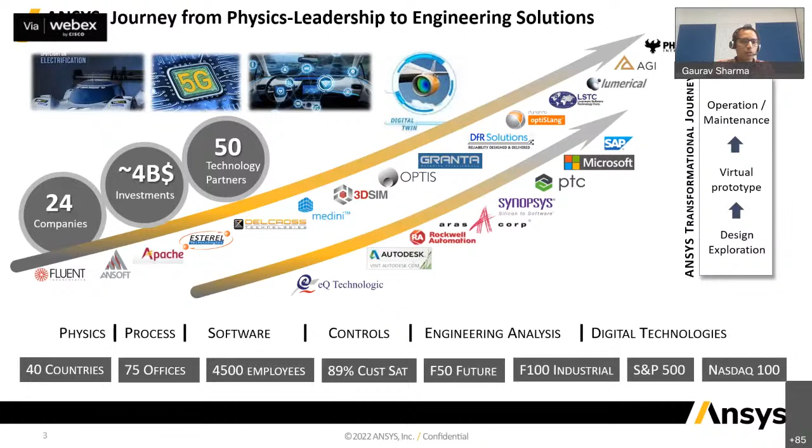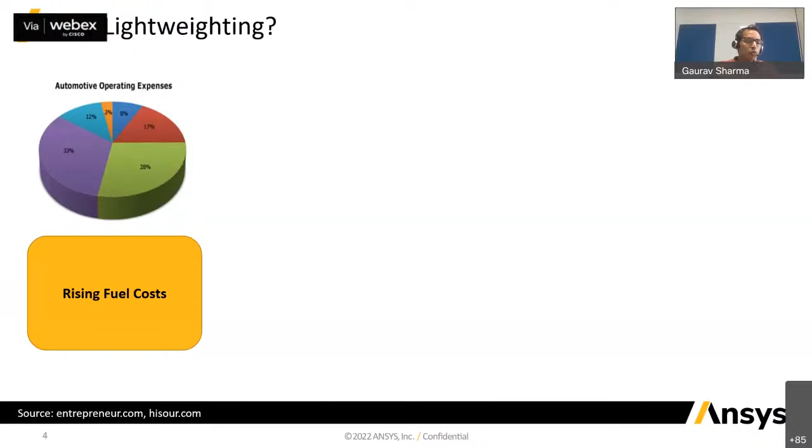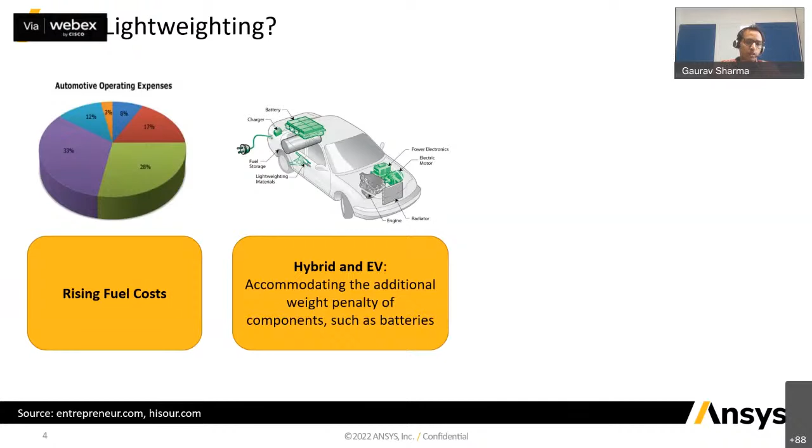With this, let me move on to the topic of the day, lightweighting. So the first question is, why lightweighting? Why do we need it? As was mentioned in the introductory note, the primary reason that pushes us towards lightweighting is the rising fuel cost. With rising fuel cost, there is a need to come up with vehicles which are more fuel efficient. On top of that, with the advancements in the field of hybrid and electrical vehicles, there is an ever increasing need to compensate for the additional weight that comes along with components such as batteries. And not to forget, the next generation emission targets are more stringent and lightweighting is important from that aspect as well.

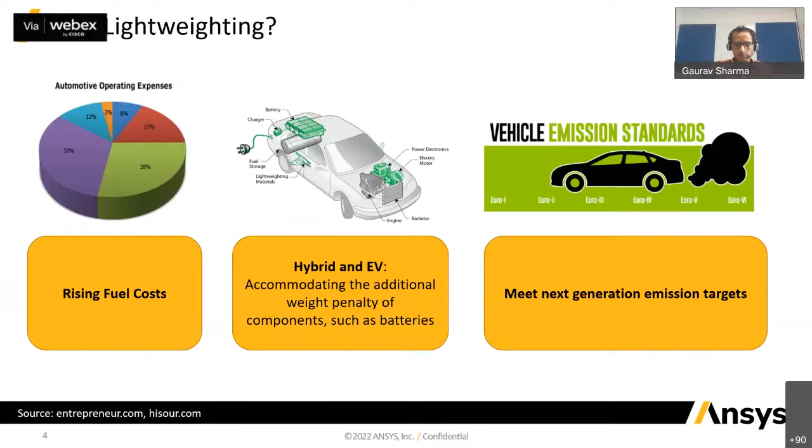So we'll talk about the first pillar of lightweighting, which is topology optimization. What is topology optimization? Topology optimization is a process that uses a physics-driven approach to work out where to remove material from a block in order to get the most efficient or the optimized shape based on certain constraints.

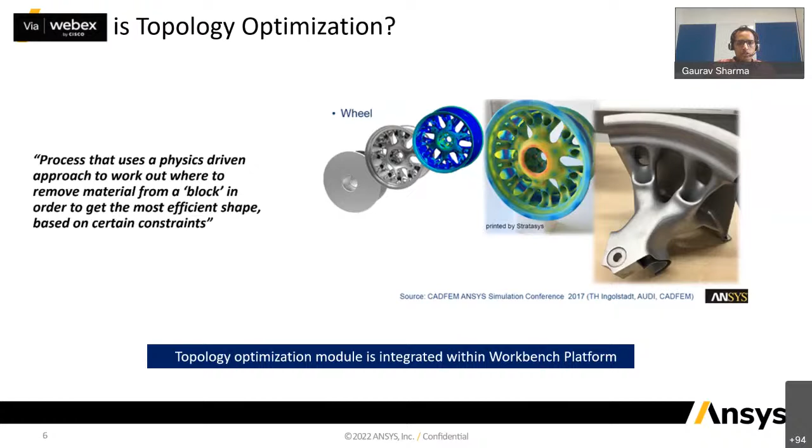So it talks about a physics-driven approach. This means it starts from a simulation that mimics the physics of the application quite well. On top of that, this topology optimization study builds upon. Now, topology optimization comes in as an integrated module along with our Workbench platform. Now we'll see how it integrates with the existing static structural analysis using an example of a journal bearing.

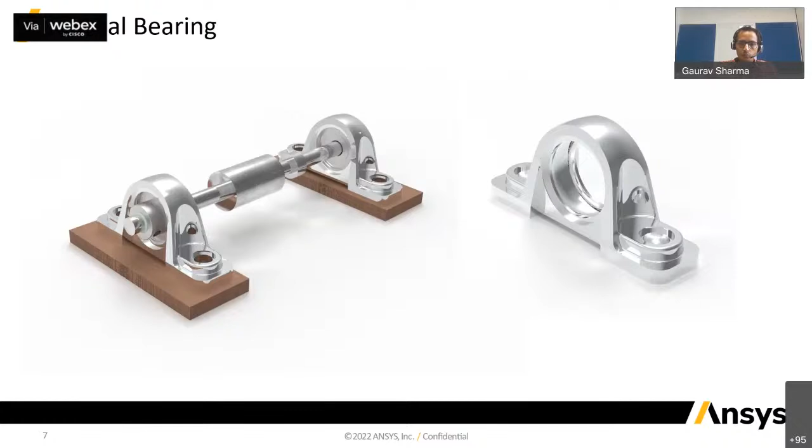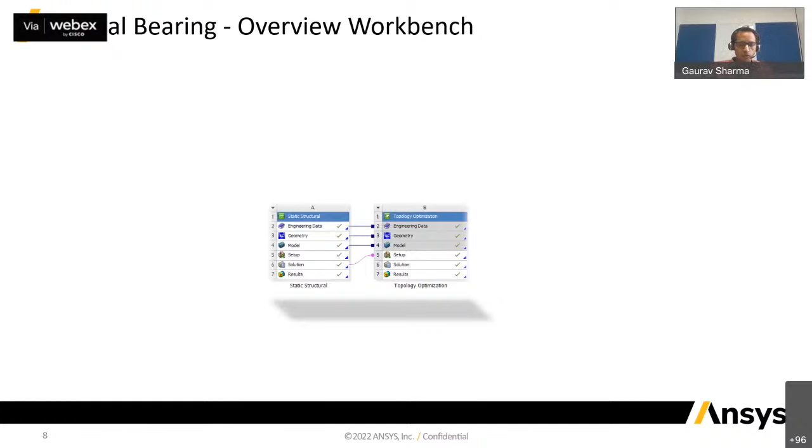Here's a bearing, and I wanted to know what is the scope of material removal in this bearing. To make a start, we perform a static structural analysis, and as I was mentioning, on the Workbench page we can seamlessly integrate the topology optimization module along with the static structural one as shown in this image. Now it's a fairly easy to use and seamless workflow.

And now we'll see what are the broad steps that are required to perform this topology optimization study. It starts with the static structural analysis. In this case, the static structural can be replaced by a modal analysis as well if the frequencies are of interest, or a thermal analysis as well. But for this example, I'm using static structural.

Now this study starts with a static structural analysis, which requires coming up with a mesh, then applying structural loads and boundary conditions and solving the structural analysis. Once the structural analysis is solved, we move on to the topology optimization part, where we define certain objectives and constraints. For a lightweighting exercise, more often than not, this objective is either mass or volume. We want to either minimize the mass or minimize the volume, keeping certain constraints in mind. These constraints can be stresses, deformation, stiffness, etc.

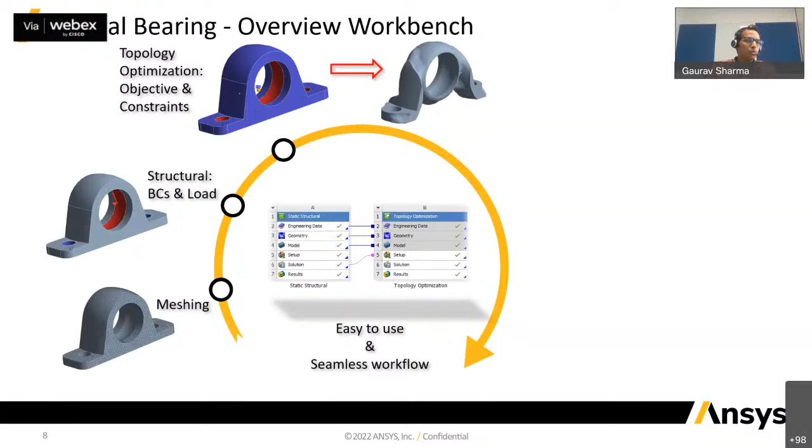Once we have completed this topology optimization study, the outcome of this study is the optimized shape, such as the one shown here. Is that the end of the road? No, we have to validate how this optimized design is going to respond to the loads and the boundary conditions that this component is going to be subjected to. For this, we perform some basic CAD operations such as smoothing and generate this geometry back, on which we reapply boundary conditions and load, perform a validation study, and get the numbers of interest such as stresses, deformations, etc.

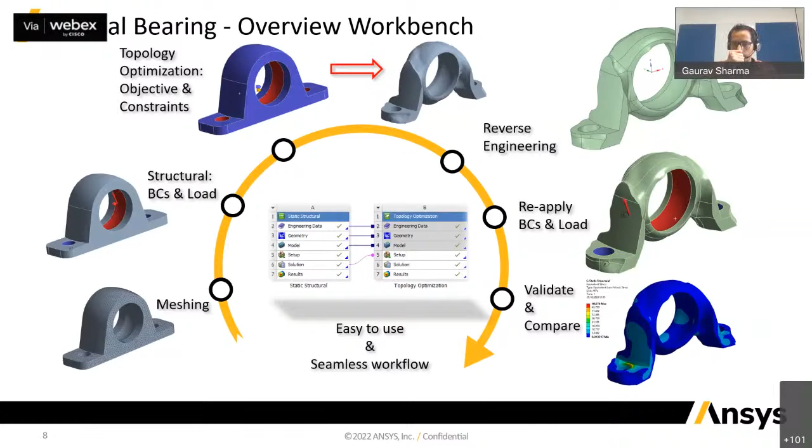So these are the few steps which are required to complete a topology optimization study. And as I was mentioning, this integrates well with static structural, thermal, and modal analysis systems. And all the steps which have been shown here are quite easy to use using the Workbench platform. For this particular case, let's look at the numbers that we have got after optimizing this.

Sorry, someone is saying something? Okay. So here are the results. This was the... You please go ahead. There's no disturbance. You can please go ahead. Sure.

So this is the geometry we started with, and this is our optimized geometry. The initial weight was around 342 grams and the final weight is 151 grams. There's a hefty weight saving of around 55%. But definitely this comes at a cost. The cost is the equivalent stress, which was earlier at 21.8 megapascal, is now 196 megapascal.

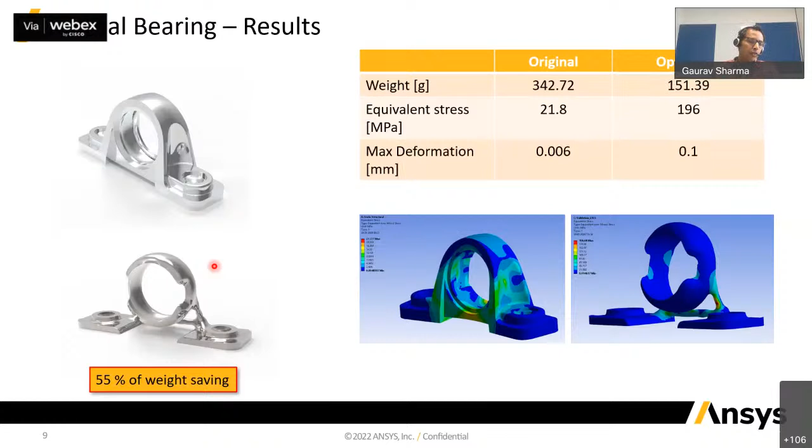And the maximum deformation is now 0.1 millimeter. But as long as these numbers remain within our prescribed limits, we are all set to go. This study indicates that this bearing, which was kind of over-designed, is now optimized, and this would be my go-to design, which would fulfill all my requirements with an additional 55% saving on weight.

Okay, now having understood what are the steps involved and what kind of results we get out of topology optimization, a curious question is what goes inside, what goes under the hood. So I'll just take you through the algorithm of how this topology optimization functions. What is the mathematics behind it?

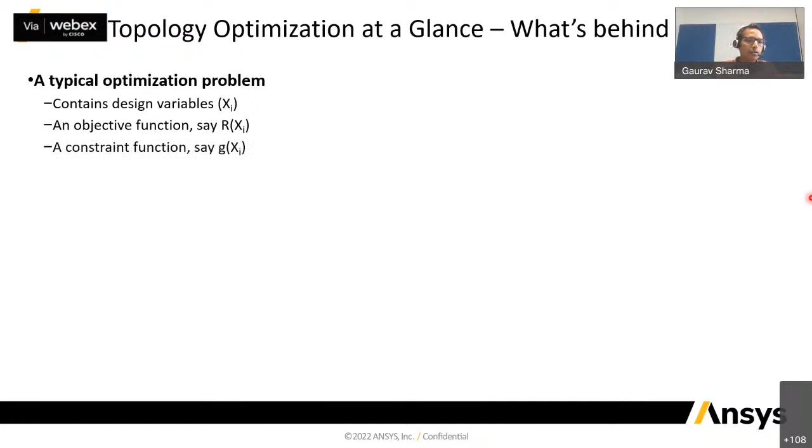For any typical optimization problem, there are broadly three things needed. One thing is a design variable. It is a variable on which the solver iterates and is trying to find an optimum value of this variable. Second thing is an objective function, and the third thing is a constraint function. So mathematically, the program is trying to minimize or maximize the objective function by iterating on the design variable such that the constraint is not violated. So this is for a general optimization problem.

Now coming to topology optimization in particular, the design variable is a pseudo density function, and this pseudo density can vary anywhere between 0 to 1. What does 0 mean? 0 means the pseudo density of a particular element would be considered as 0, which indicates the existence of this particular element is kind of redundant. We can drop this element. But if the pseudo density is selected as 1, that means this particular element would be retained for this analysis.

The objective function for a topology optimization study is definitely going to be mass, and then we can have a number of constraint functions that can be stress, deformation, or manufacturing criteria. Basically, the problem definition goes like this.

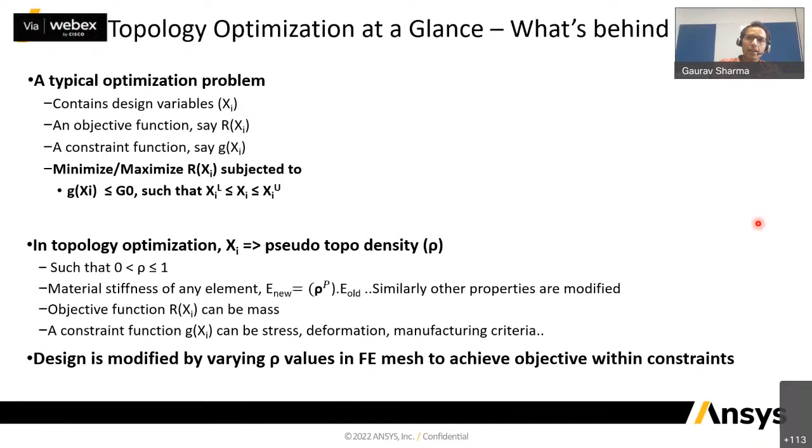The optimizer functions in a way that the design is modified by varying these pseudo density values in the FE mesh. So at each element it tries to see whether the presence of this element is required or not. If it is not required, it will drop the element by assigning it a value of 0. If it is required, it will keep the element, and this is how it keeps on iterating and tries to meet the objective, keeping in mind that the constraints do not get violated at any stage.

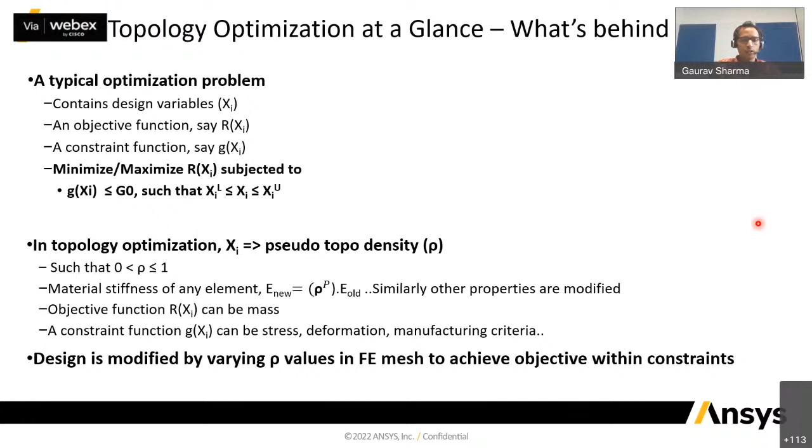By dropping an element, if the constraint is violated, it will take a step back and it will make sure that the element is retained. So broadly, this is how the algorithm functions. Now let us look at some types of optimization. Within topology optimization, there are broadly three categories. One is what we have already seen, topology optimization. The entire topology is modified.

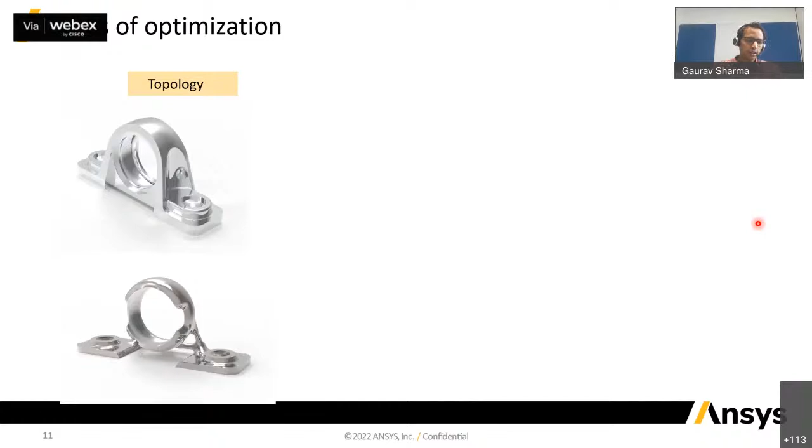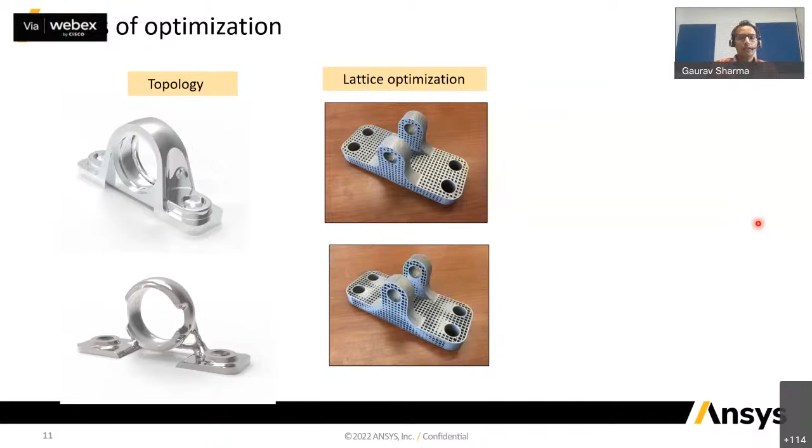The second one is lattice optimization. In lattice optimization, the external shape of the geometry is retained, and we do see the geometry being idealized using lattice structures. The third one, just for the sake of completeness, is shape optimization. This is not a mass optimization algorithm, but it functions by morphing the nodes and is beneficial in redistributing the stresses at the critical locations.

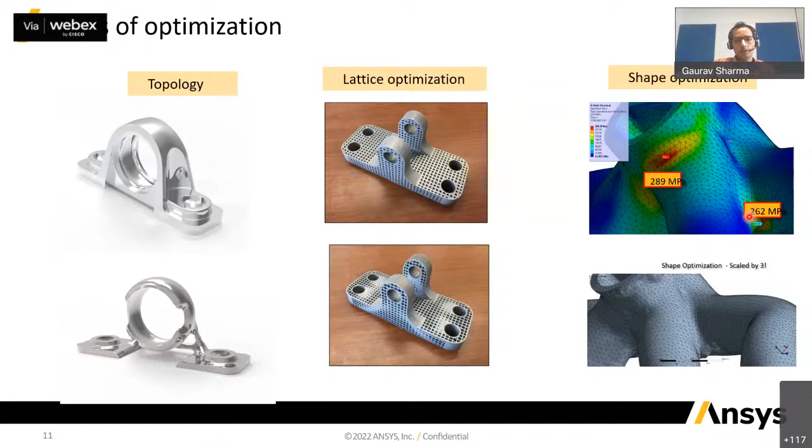So for the sake of this discussion, we'll be focusing only on topology and lattice optimization, which are the algorithms aimed at mass optimization, mass reduction. Let's take a look at one of the application examples of a knuckle. Now here I have a knuckle that I want to take through this, and I want to reduce mass out of it.

In order to do so, as I was mentioning earlier, we need to perform a static structural analysis. For doing so, we want to understand what are the different loads which are going to come on this knuckle. If that information is available, well and good. If it is not, sometimes we may have to perform an RBD study, from where we can get the information about the different loads which are going to come onto this knuckle, and then we perform a static simulation using those loads and boundary conditions.

Once that is done, we have two different mathematical approaches for topology optimization. The density-based approach is what I was explaining in a previous slide. That's a mature 30-year-old technology, but we now also have a level set based approach, which is relatively new, and it works better for most of the complex load scenarios.

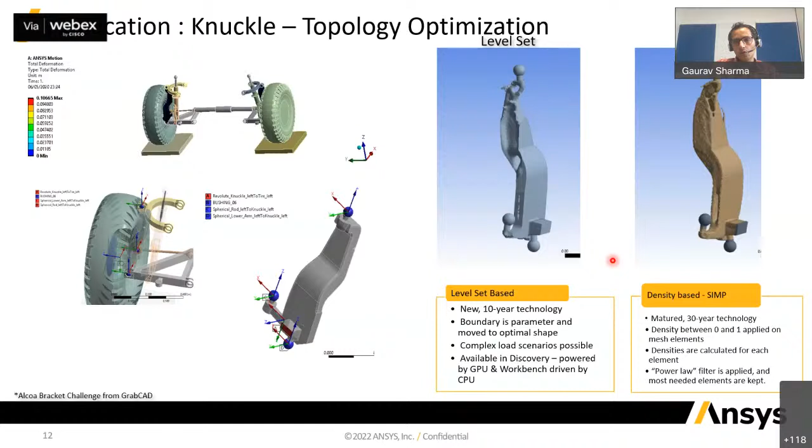But eventually, if you can see in both of these images, the optimized shape looks fairly similar. There's not much difference in the optimized shape. Eventually, they take us to the same results, but through a different route, through different mathematics. Next, we'll have a look at another example of a bracket, which works with lattice optimization.

Now, this is a bracket which I want to reduce the weight of. For this application, I do not want to change the outer shape of this particular design. So what we do is we put it through lattice optimization. In lattice optimization, the solid material is substituted by beam structures depending on the FE calculations, and this is the kind of structure we eventually get.

Now the problem that arises here is with respect to validating this optimized geometry. The optimized geometry is highly complex and the material is highly discontinuous. The mesh needed for this structure would be huge, and so would be the computation time. So the validation becomes challenging, and that is the reason we have introduced an approach based on knockdown factors, where we do not have to actually take this optimized shape into a validation study, but based on the knockdown factors, we can take this particular shape only to a validation study.

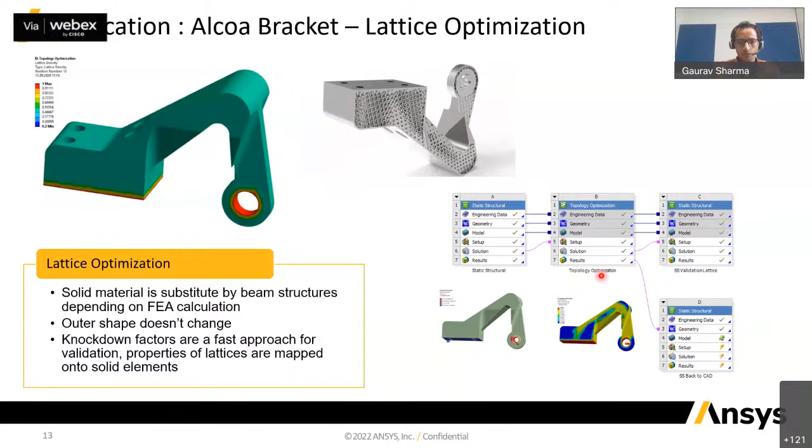You can see it over here. So after performing this optimization study, the validation was performed not on this geometry, but on this geometry. But the effect of this lattice was taken into consideration using the knockdown factors. So this makes our life very easy when it comes to validation.

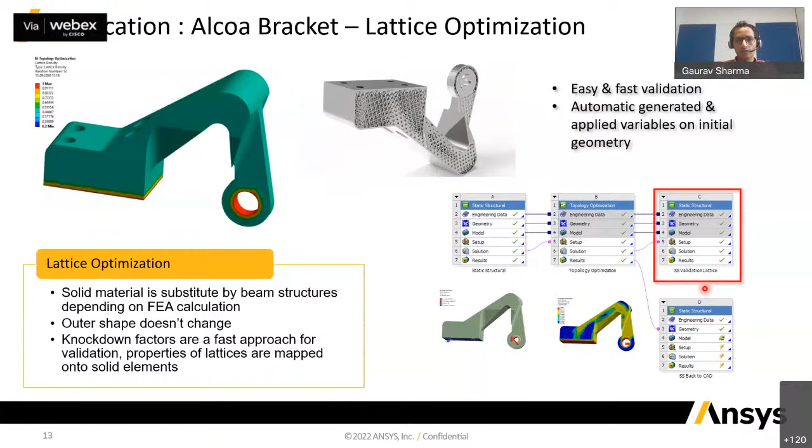But alternatively, if one needs, we can also generate this geometry through back-to-CAD operations using some basic geometry operations. So the point to highlight here was that validation performed using knockdown factors makes it much easier and faster to analyze the optimized design that is coming from lattice optimization.

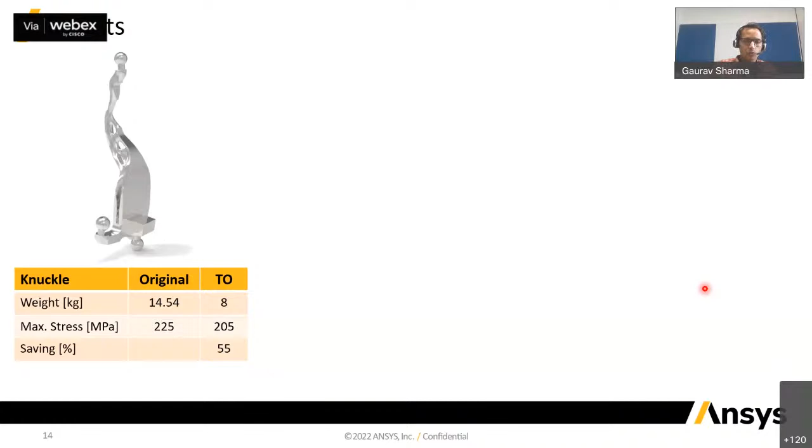Okay, so we have seen these couple of cases. Now let's look at the results we get for this. This was the optimized shape of the knuckle. The initial weight was 14 kgs and the optimized geometry had a weight of 8 kgs, a hefty saving of around 55%. And due to the elimination of stress concentration region, the stress is also observed to have reduced from 225 to 205 megapascal.

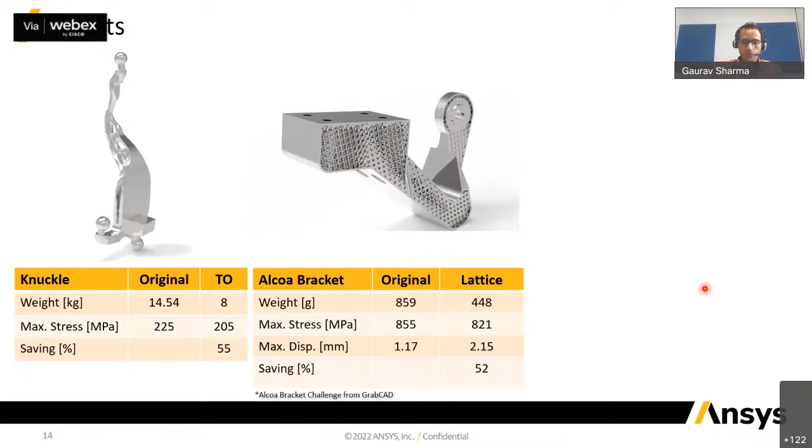For the lattice optimization bracket study, the weight is reduced by 52%, but definitely with the reduction of weight, the stiffness has also reduced. So this displacement is increasing. It has moved up from 1.17 to 2.15 mm, but as long as this is within our prescribed limit, all is well. Now, the third study that I did not go into the details of was with this manifold, and we can see that this was aimed at redistributing the stresses, and the stress distribution got improved by 32 and 12% after this study.

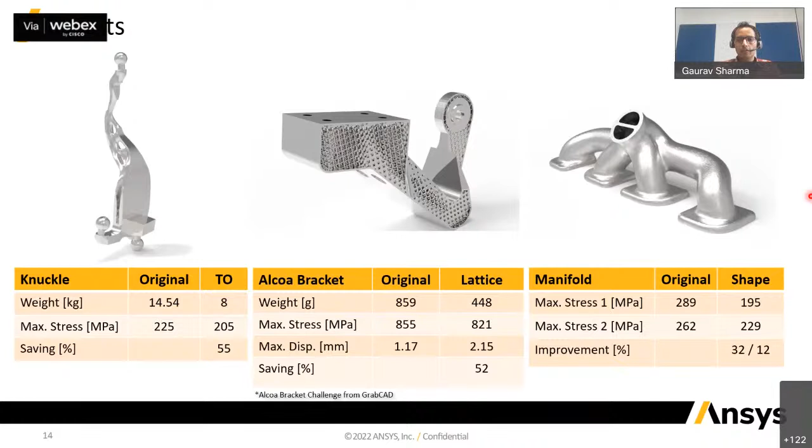So this is broadly what I wanted to capture on topology optimization. Now, topology optimization definitely remains one of the most critical, most useful tools when it comes to lightweighting, because it is easy to use and because it is fairly automated. We just have to provide some boundary conditions, constraints, and objective at the GUI level, and the solver takes care of the rest of the things.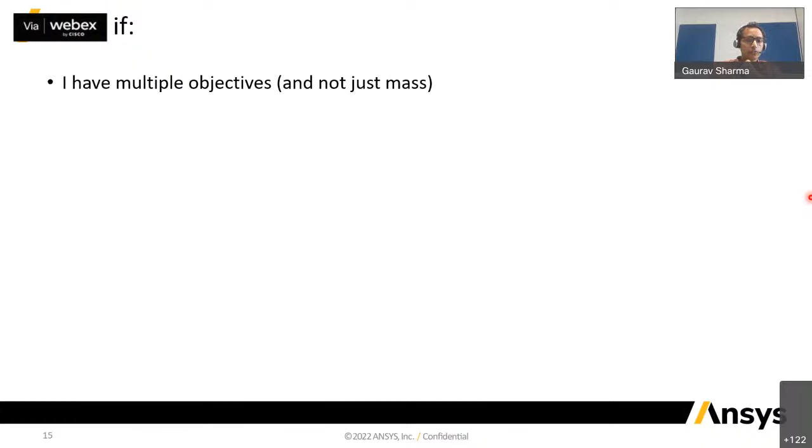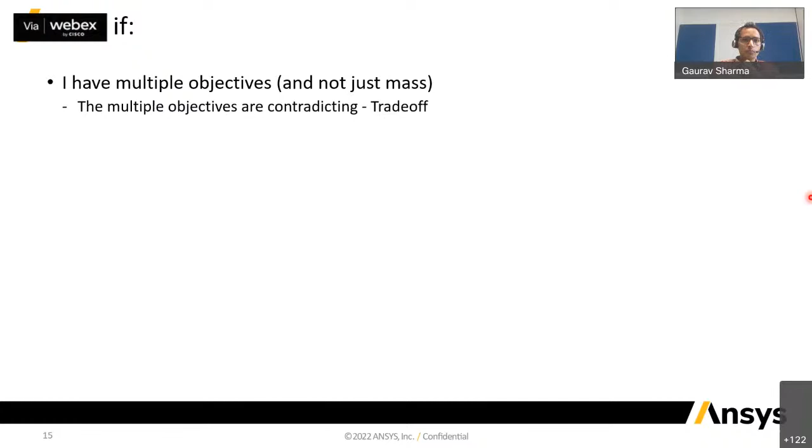But the problem is, what if I am dealing with a situation which is more complex? What if I have multiple objectives and not just mass reduction? And things can become more complex if these objectives are contradicting. So there would be a situation where a trade-off has to be done. What if I am exposed to such scenarios? Then what if I am dealing with a physics which is something other than thermal, modal, or static structural, because topology optimization works only in conjunction with these three analysis systems.

These are the cases where I might need more insight to my problem. I need to dive deeper into my optimization study. I want to witness what trade-offs are going on. I want to take a decision on the trade-offs. So for such cases, one such example that I can think of is a rotor study.

A brake rotor is something where I do not just want to remove the mass, but the deformations are also important. The noise levels are also important. Emissions, appearance is also important. So there are quite a few parameters which are important to us. There are quite a few objectives that I have to deal with, and not just the mass. Mass is one of the important objectives, but I also have to ensure that other objectives are also fulfilled. And if there are contradicting objectives, I want to understand what the trade-off is, and I want to make a final statement on what trade-off I am okay to go ahead with.

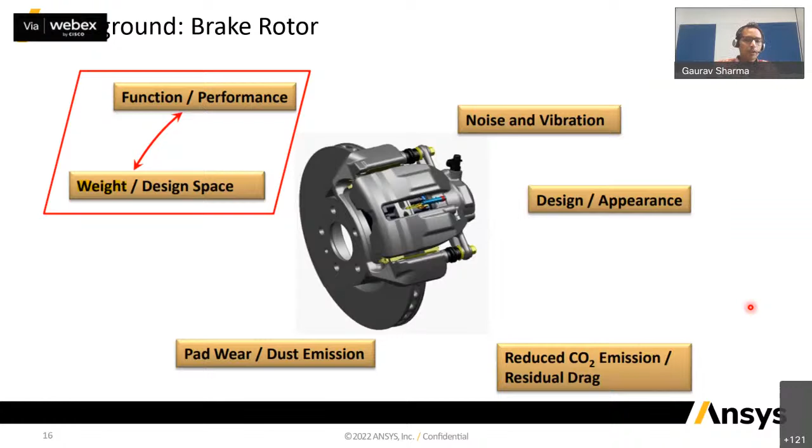So for such cases, parametric optimization offers a great solution. And this brings me to the second pillar of light weighing, which I mentioned as parametric optimization. Now, ANSYS offers solutions like optiSLang, which helps us perform a parametric study. It says that there are 4 stages that lead to a robust design. Stage 1 is model calibration. Again, this is driven by simulation. The starting point of all this parametric study is a simulation that mimics the physics of our application.

Going down the line, we'll be performing a design of experiment study. It would need a good amount of solver runs, 20, 50, or sometimes 100. So there is going to be an investment in terms of computational time and resources. Now, before we go on and make that investment, it is important for us to establish that the CAE model that I'm using mimics the laboratory condition well. So that is being taken care of at this stage, which we call model calibration. Any unidentified parameters, for instance, any material properties, we perform the regression analysis and we make sure that the model we have is well calibrated with the laboratory before we move ahead.

Stage 2 is design understanding, which we also call sensitivity. At this stage, we try to see how sensitive our design is to different parameters. What happens if I tweak certain parameters? How is my design going to behave? These certain parameters can be geometry based parameters, especially when we are talking about light weighing.

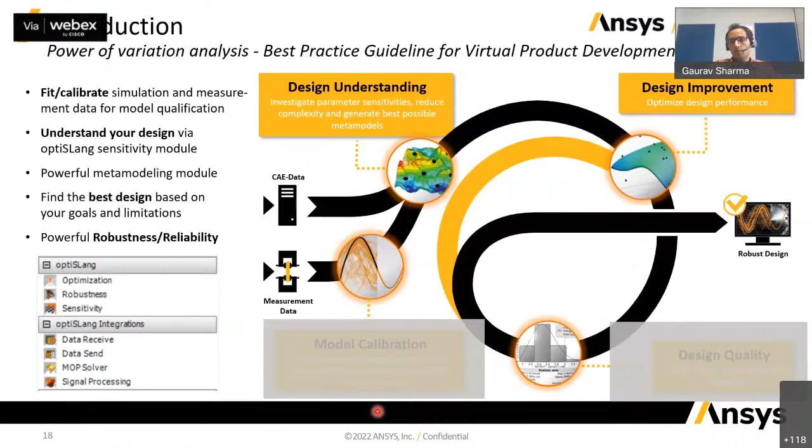So the first stage for lightweighting becomes sensitivity study, sensitivity analysis. This means at this stage, I want to understand what happens with my design if I change a certain parameter. So what goes in as an input to this sensitivity study is the outcome of a parametric study or a design of experiment study, which needs a number of solver runs.

So I have identified parameters that I assume to be critical for my application or for my design, and I want to change these parameters within a certain range. So this range defines a parametric space or a design space, and now I want to understand how my design is going to behave within this design space. So the outcome of a sensitivity study is such meta models which is shown here.

This meta model is nothing but a mathematical relation which is being plotted on a 3D plot between the output and input. So it tells us how my output is going to vary if I change certain input conditions. On top of that, the output of sensitivity studies is also parameter importance. It tells us, out of all the parameters we assumed, which parameters are critical for a given objective.

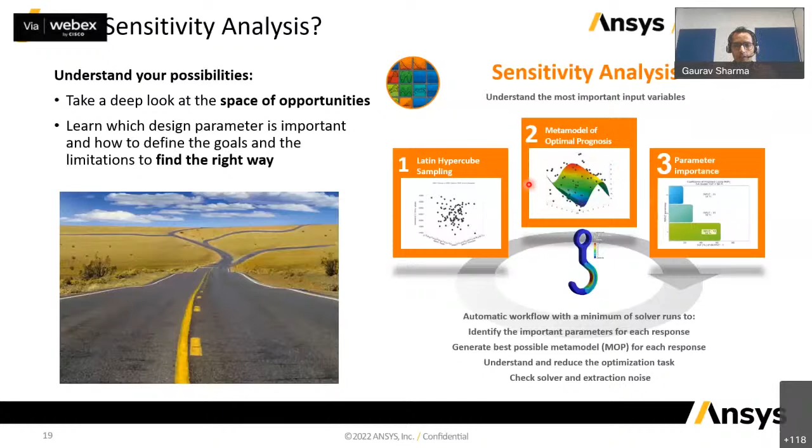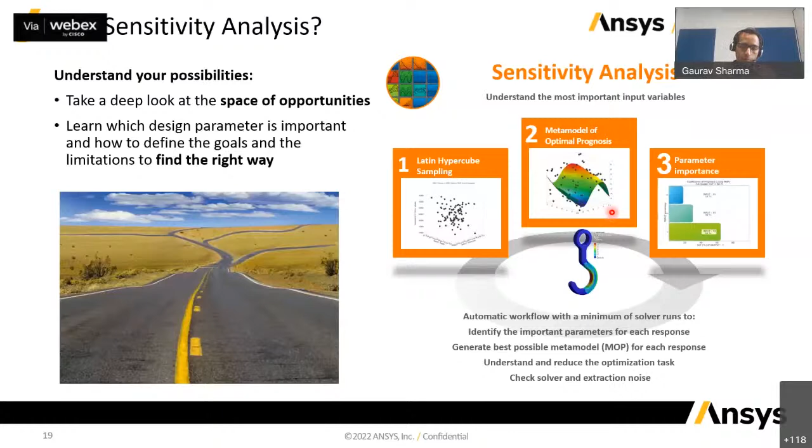Once we have these meta models available, these meta models are essentially an image of what all can possibly happen, or what all this design can possibly do for me within the design space. Now, when we talk about mass, often the optimization point is a minimum point. So the next question is what we do with optimization in terms of lightweighting. Once the variation of mass with different parameters is known, we want to get to a point where we are talking about minimization of mass.

So there are two ways we can attain this. On the meta model, the optimization can be performed, which we call indirect optimization. If the response surface of my meta model is such as this, which is not very highly nonlinear, we can perform this optimization on the meta model itself, and I'll get to the point where the mass is minimized.

The problem here is when the meta models get complex and very highly nonlinear, such as this one, what happens then? There are so many local minima over there. For such cases, this optimization on the meta model, or indirect optimization, may not yield the best results. So we do have approaches which are called direct optimization. We do have those algorithms which will help us deal with such highly nonlinear cases as well.

The bargain is optimization on the meta model is fairly quick, hardly takes a minute or two, and it just requires one additional solver run that is performed on the optimized value to validate whether whatever we were predicting is correct or not. However, the direct optimization needs quite a bit of additional solver runs, and it definitely has an impact on the solution time in that case.

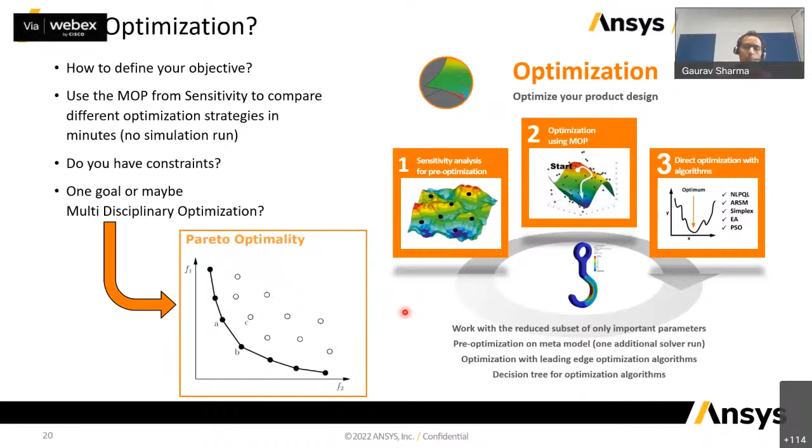So this is just one example, but I think we are able to relate now how these Pareto fronts and Pareto charts are useful when it comes to multi-objective, multidisciplinary optimization. So we'll take a pause and I'll just share this case study of a brake rotor, wherein we'll see what kind of trade-offs we have to do when there are multiple objectives.

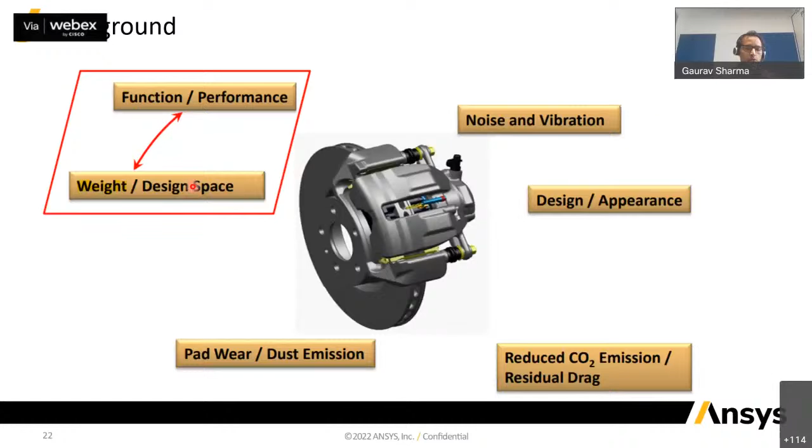So this is again the same rotor problem, and we'll see what kind of trade-offs go in when we are optimizing with mass on one side and other performance related parameters on the other side. When it comes to performance related parameters for this particular application of rotor brake, coning is one parameter which is of importance. Under the effect of thermomechanical loads, these sorts of deflections come into the picture, and they have an adverse effect on brake torque variation. So coning is one aspect of performance, and the other aspect of performance is high stresses at some of these locations at the time of deceleration. So both these characteristics need to be evaluated in a rotor design along with the mass optimization.

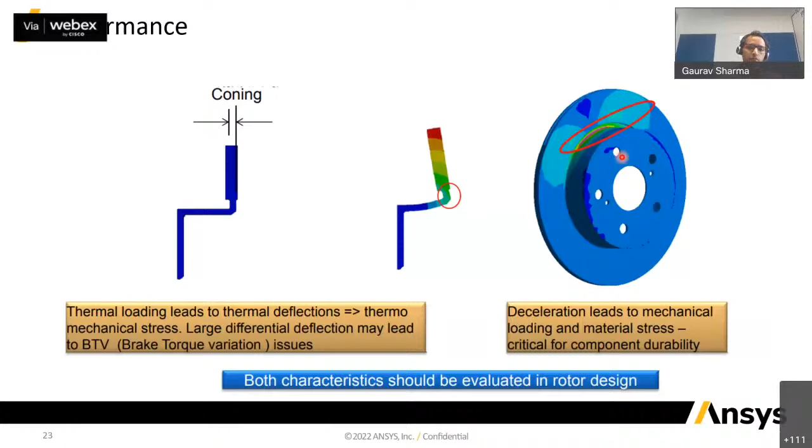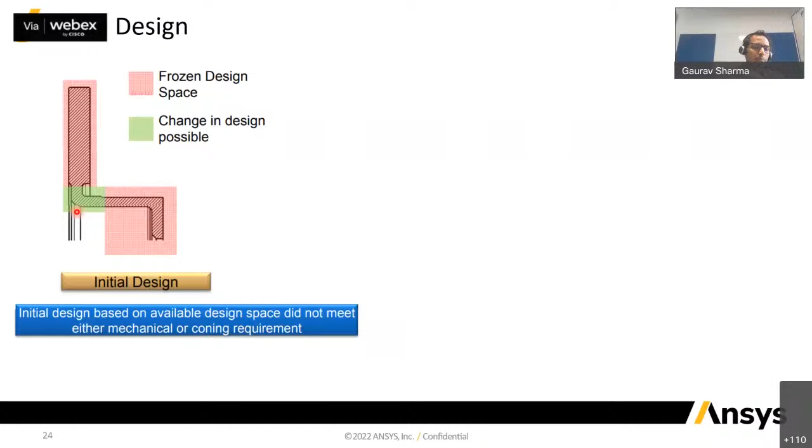Now when we go for a mass optimization problem, we have a design space. In order to retain the functionality of the rotor, we cannot play with any geometric parameter in the red zones. All we are left with is the green zone. Now, when we are trying to improve the performance by making some changes at this region, definitely we can add a lot of mass over here and the coning will go away. The stresses might also get better, but then the mass optimization comes into the picture. We need to have a limit on that.

So there are n number of design ideas. I may play around with the configuration around this region. I can come up with something like this or something like this, but I'm really not sure what the effect is going to be on coning and the deflection and the stresses along with the mass. So the way to go ahead is to identify the relevant parameters and create a parameter space.

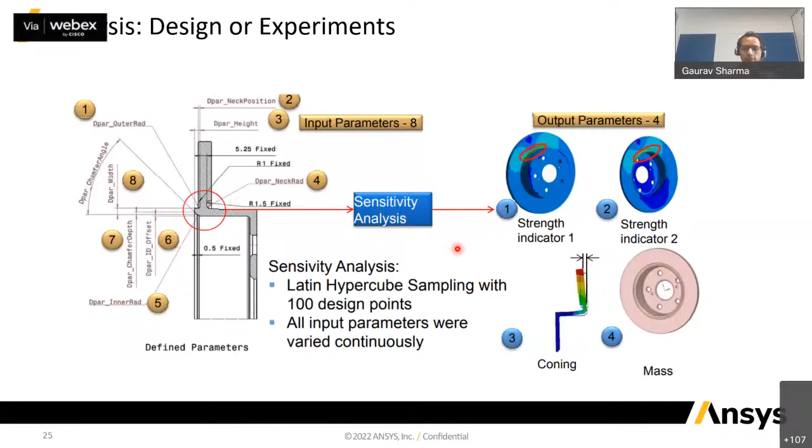What I've done here is I have gone through this narrow region and I have defined 8 different parameters that will completely govern the shape and size around this region. And I have associated a range to these parameters. These become my input parameters. On the output side, I have 4 parameters: stresses at these 2 critical locations, mass of the design, and the coning angle. Now I perform a design of experiment study followed by a sensitivity analysis. So what this sensitivity analysis gives me as an output is these kinds of meta models. These are the governing equations.

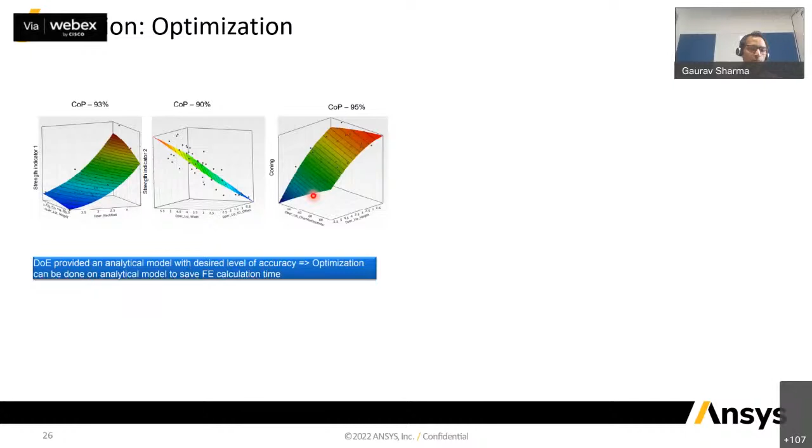So these tell me how any output is going to change if I change a particular input condition. Now the problem for me is, let us say for coning angle, this becomes my optimized point. So these corresponding input conditions I would like to freeze, but unfortunately I can see that these input conditions have a drastically adverse effect on the mass of the design. So I may not necessarily live with this particular condition. I have to make a trade-off. I have to do some relaxation on coning just to make sure that the mass of the application does not go beyond what it is currently. So that sort of trade-off is again done at the Pareto front end.

As I was mentioning, once these meta models are available to us based on say 20 or 30 solver runs, now I can extract thousands of design points from these meta models without having to perform any single extra run within a fraction of a minute. So these Pareto charts are developed within a fraction of seconds. Using this Pareto chart, on the x-axis I have mass of rotor, and on the y-axis one by one I'll put the rest of the parameters, and this red line becomes my Pareto front. On this front I will pick one particular design that would most appeal to me. This would be my decision.

In this case, the optimized design looks something like this. And when it comes to performance parameters, the mechanical strength indicator or the stresses at region 1 came down by 19%. In region 2, the stresses came down by 25%, and the coning deflections came down by 27% compared to the initial design, whereas no significant increase in mass was observed because of these changes. So this becomes the solution of my optimization study in this case, where there are multiple objectives which are in conflict with each other.

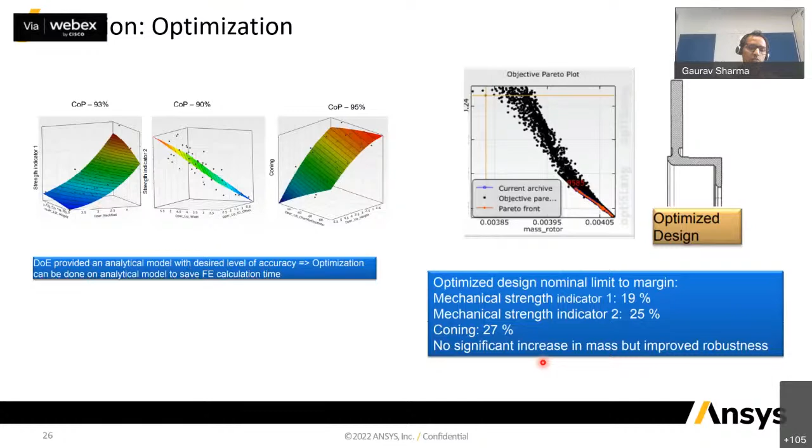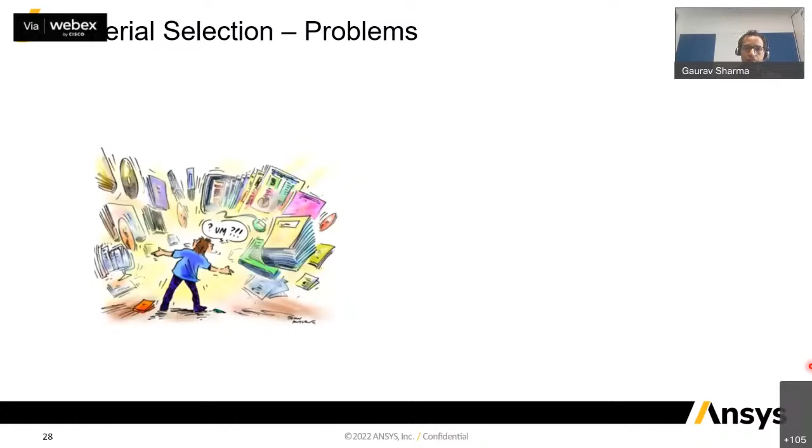Okay, so having discussed topology optimization and parametric optimization, this brings me to the last segment of this presentation, which talks about lightweighting through using advanced materials, or as we'll see, alternate materials. Now in the current setup, our material selection process is usually governed by what we are used to, what we are already using, what the company's preferred materials are, or whatever materials are being supplied to us by vendors and suppliers. And for identifying the material properties, we have a lot of resources. We can even do web browsing and identify the material properties for a corresponding material.

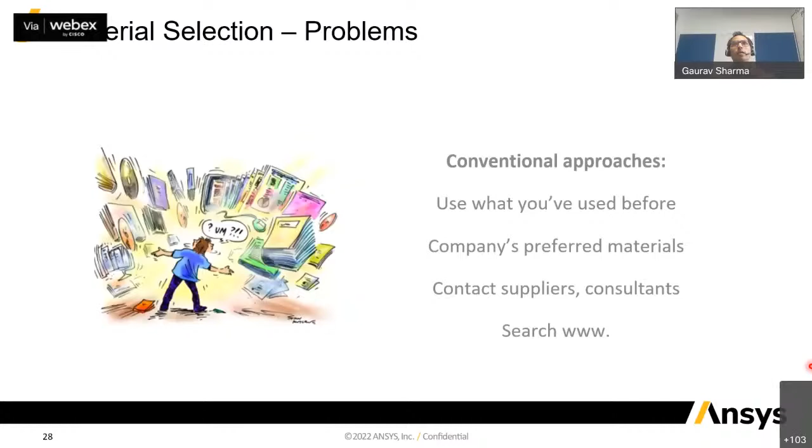But simultaneously, material technology has seen advancements, and we now have materials available which may have the same structural performance compared to our traditional materials, but may be less dense or weigh less. The question is how to identify those materials, how to reach them. Our current database may or may not have information on those materials. Sometimes people do such exploration in silos. There are different teams in an organization, the design team, the simulation team, and all the explorations we performed, whatever we identify, remain in silos. So we do not have a global or universal repository which we can look into.

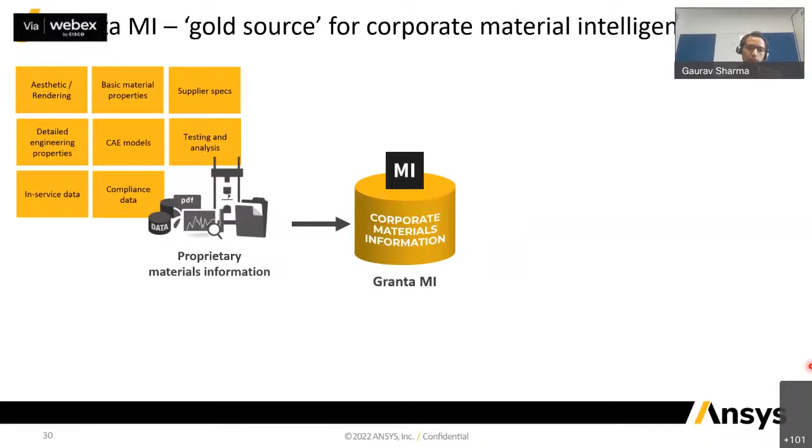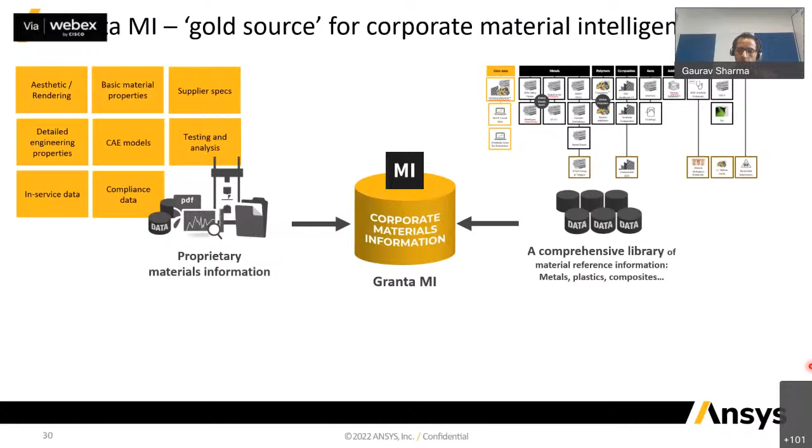For this, ANSYS offers a solution in terms of ANSYS Granta MI, which is a gold source for corporate material intelligence. It can consist of all the proprietary material information available within an organization. This proprietary information can come from CAE models, laboratory testing, or a comprehensive library based on existing data from different libraries that people might be referring to. So all this information locally available within an organization can go into Granta MI, and this becomes a repository. In subsequent slides, we'll talk about how, once we have a universal repository, we can use it through Granta Selector to come to an alternate material.

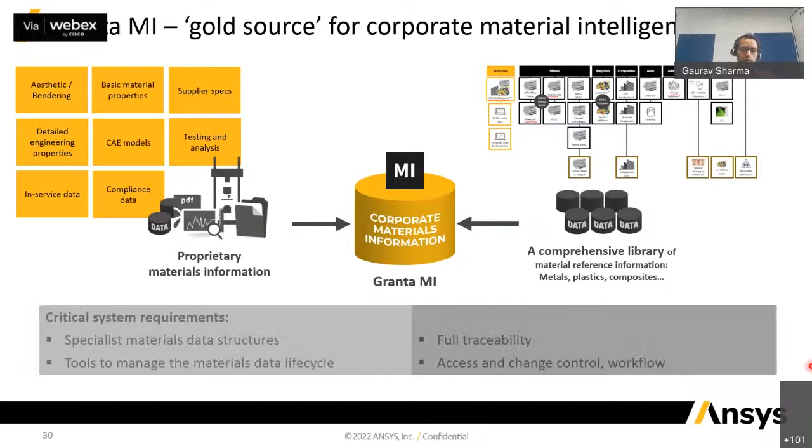Now, Granta Selector is an encyclopedia of material data. We have our own material database, and the locally available material information can also be fetched into this pool. And it's a powerful visualization, filtering and solving tool. We'll see how that filtering takes place in the next slide through an example.

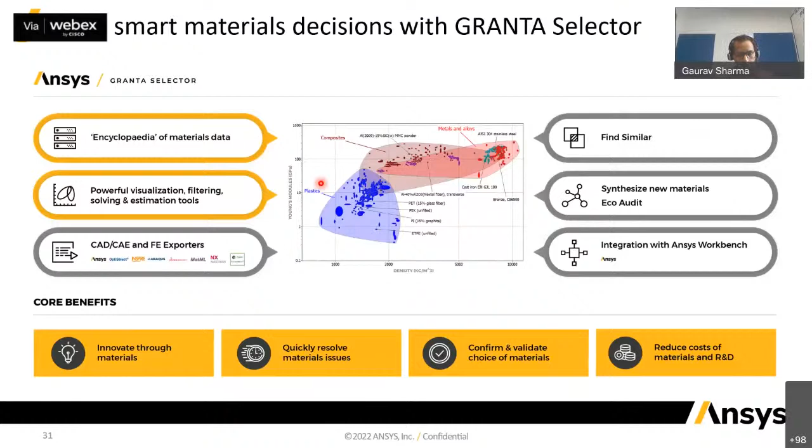For the sake of simplicity, let me start with an example where the cost of material is important. So I have this component which is made up of PA66 with 30% GF. This is a composite. So I'm plotting to begin with all polymers which are available in the library. Because cost is important for this study, I put cost on the x-axis, and flexural modulus, something I do not want to compromise on, is put on the y-axis. Now my current material lies somewhere here.

If I move horizontally from here, there is a large range of materials that can be used as alternate materials for the same flexural modulus. Definitely, if I move in the positive direction, these would be costlier materials. If I move in the negative direction, I'll get materials which would be relatively cheaper. Now, this is still a large pool of material.

What I can do is add further filters, further criteria, such as I only want to go ahead with materials which can be manufactured using injection molding. That might be another constraint that I have to respect. And we can see we have narrowed down further. Some of the materials have further grayed out.

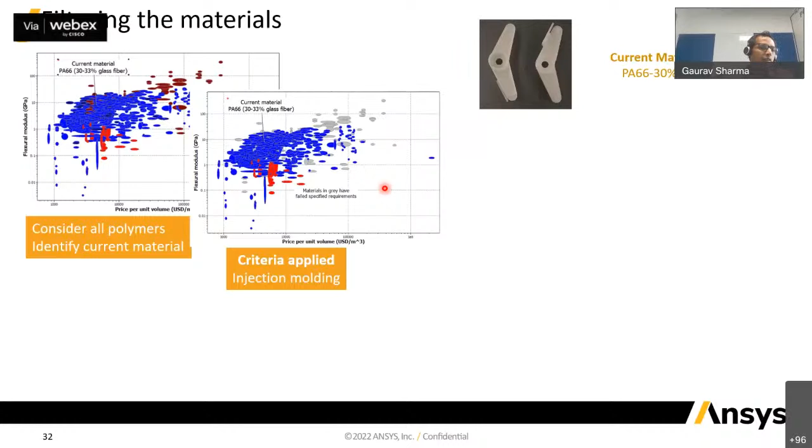I can use a few more criteria or filters that I have to respect, such as a filter on stiffness, impact and moisture absorption. I do not just want to have a cheaper material. I want to make sure its moisture absorption is comparable to my existing material. So once I put on those filters, it narrows down further for me.

And at this stage, I can see that this was my existing material. When it comes to lower cost, I have three more options available. So optimal candidates become PP 50% LGF, PBT 30% GF, and PBT 40% long GF. So that is how the exercise goes when we talk about finding an alternate material using Granta Selector.

So we talked about creating a repository. Granta MI has a role to play when it comes to integrating the locally available material data along with what is available within Granta Selector. And once we are within Granta Selector, we can perform such exercises.

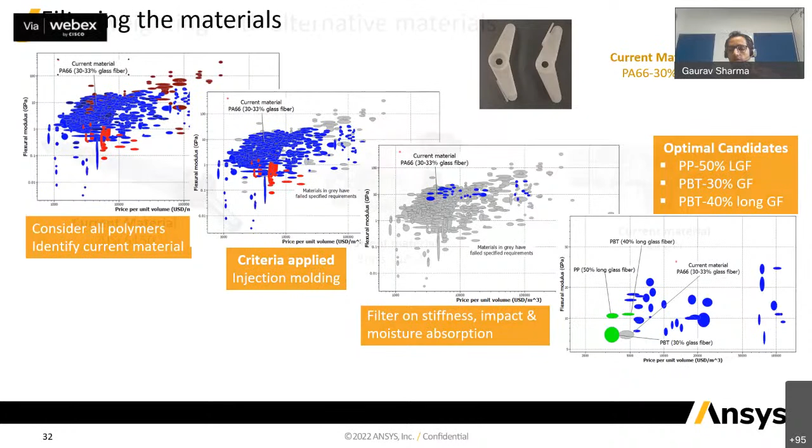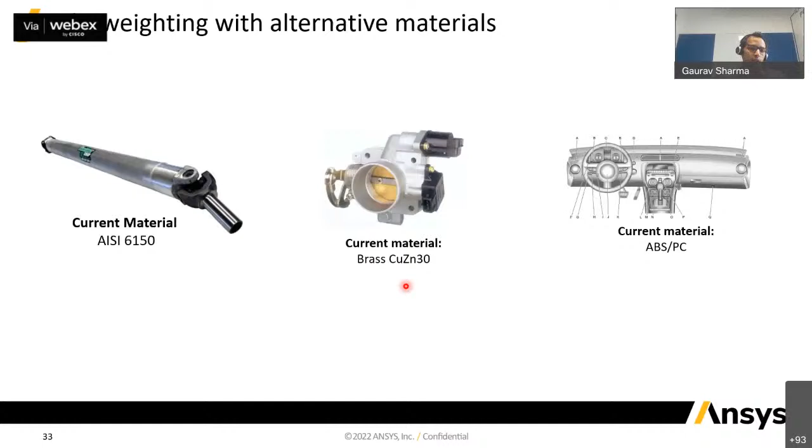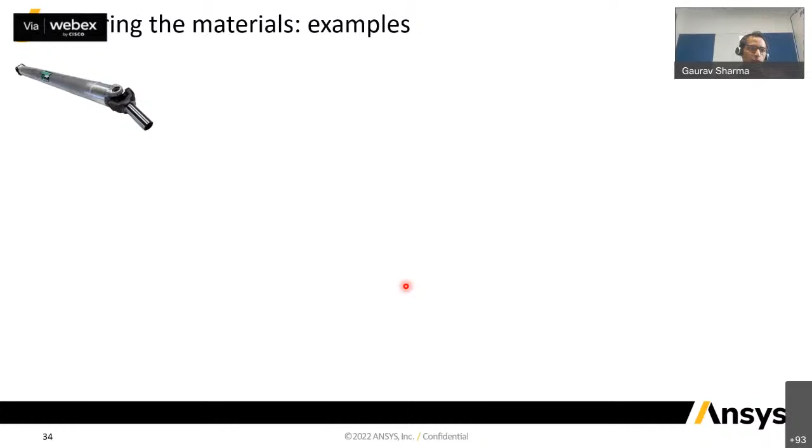Hello, Gaurav. Actually, you're not audible right now. Hello, Gaurav. You're not audible still. Hello? Oh, yeah, now it's audible. Can you just come from the start? I think we lost you from the first material itself. The audio was not. Okay. So should I go back, Suraj? At what stage? From the first material itself. From the first material, you can start. Okay, so on this slide only, right? Yes, on the slide, from the first material. Okay, sure. I'll go back a bit.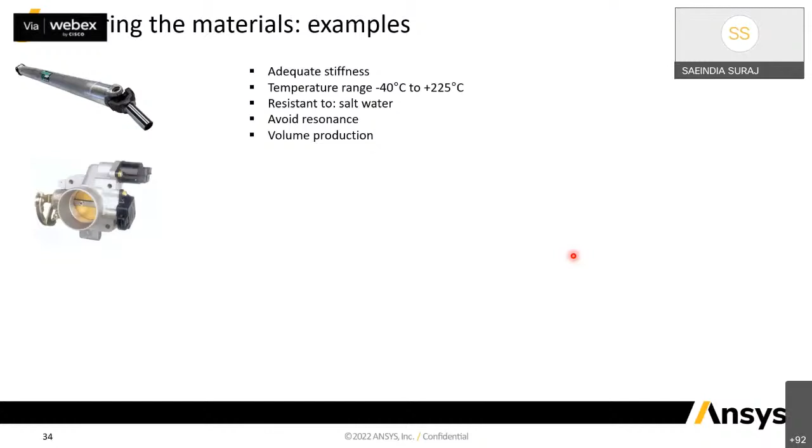All right. So all I was saying is, before we go and use the Granta Selector to find alternate materials, we have to list down what our requirements are when it comes to the application of this material. And this often has to be looked at in conjunction with what application we are dealing with.

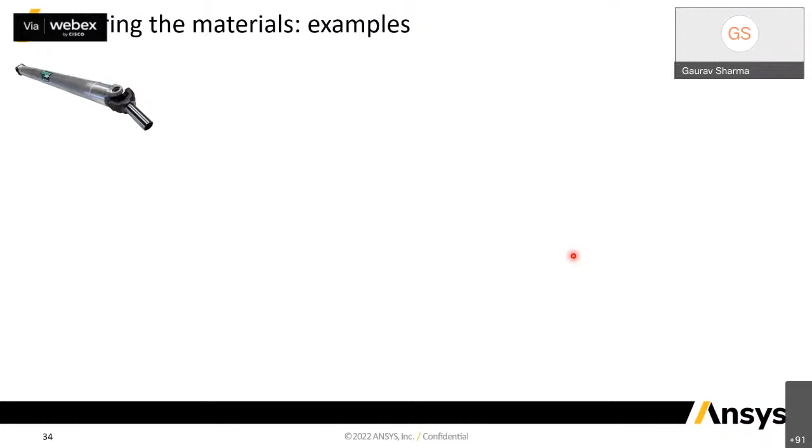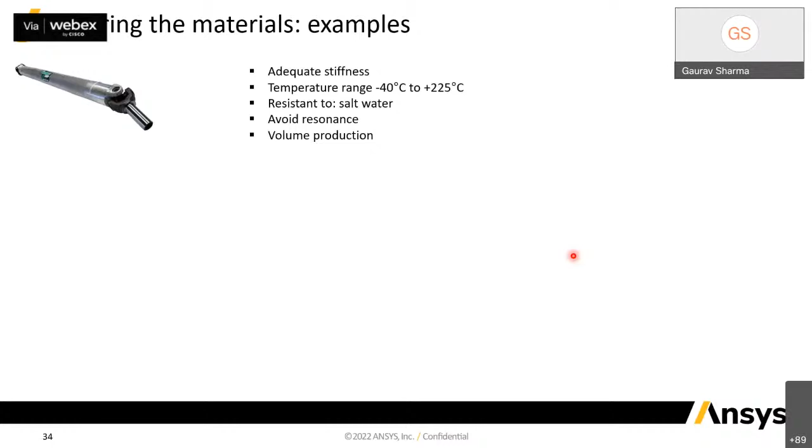For the steering rod, it should have adequate stiffness. The operating conditions are -40 to 225 degrees Celsius. It has to be resistant to salt water. That is again coming from the application. It must avoid resonance and it should be made of a material which can go under mass production.

On the housing side, again, we have some similar parameters listed that are important for this application, and that would be useful when we try to identify an alternate material. These would be the filters that I'd be using. And similarly for the dashboard, it should have high toughness, be durable to the environment. The temperature range should be -20 to 105 degrees Celsius, and it should be manufacturable by near net-shape processes.

Okay, so with these objectives, I went through the similar exercise using Granta Selector, and I've come up with alternate materials, materials which have similar performance but are lighter in weight. So for the steering rod, we have carbon reinforced BMI, which is 75% weight saving, PPS 60% glass fiber, which is 60% weight reduction, and for ABS we have PP 20%, which is 35% lower cost.

Now this looks very aggressive. I mean, this looks wonderful, great, 75%, 60%, 35%, great numbers. But we also need to validate what we are going to do. Because we started off with something made of steel. Now we are talking about fiber reinforced plastics here, right? So the failure modes might have changed, and we need to take one extra step to validate what is going to happen if I change the material from steel to, let us say, carbon reinforced BMI.

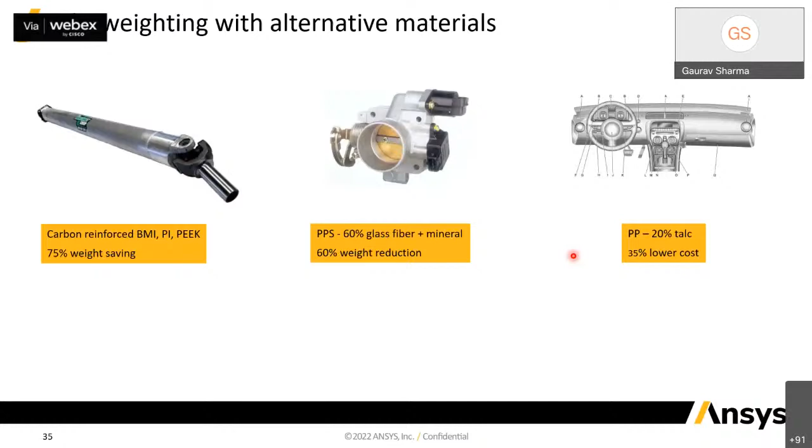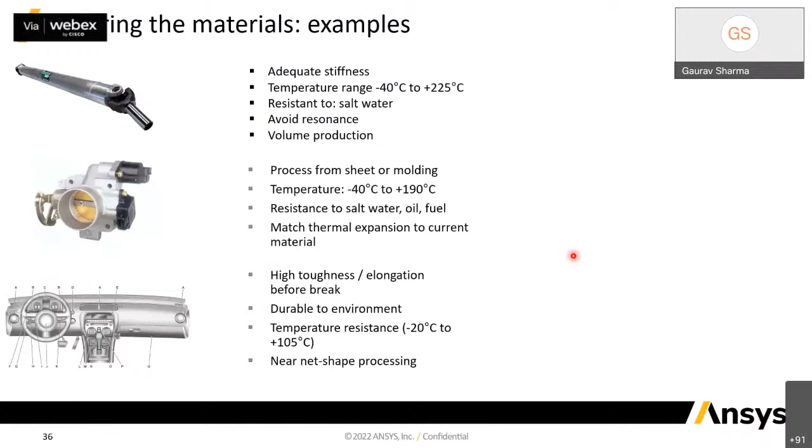In order to do that, a simplified step can be coming up with idealized geometries and performing simple simulations over there. So this steering rod can be idealized by something which looks like this, and it is predominantly going to function under torsion. And for the other two applications, we can come up with something like a plate, which is just going through bending. Then we can use the new material properties and see how these idealized geometries behave. We have to ensure that we are not missing anything once we make this change from traditional material to the reinforced materials.

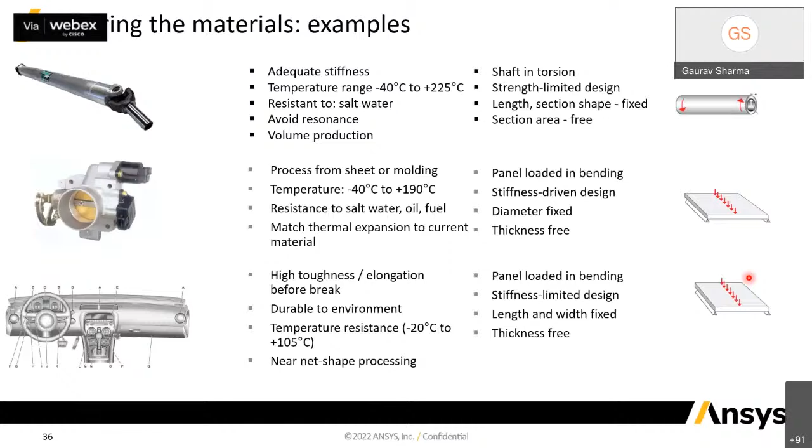Now this is still easier said than done. For the lightweighting aspect, this looks good, this is fine, but it still has an aspect to it which comes to thorough validation. In most of the cases we saw, the resultant material was short fiber reinforced plastics, and these can have different failure modes. So at this stage, we want to take it one step ahead and perform a thorough validation using simulation.

I'm not going into the details of that thorough validation. That opens an all new topic of how these short fiber reinforced plastics can be put through simulation. But it is important, while we're talking about lightweighting, to mention that validation is important. Whatever alternate material we have identified, we have to put it through validation.

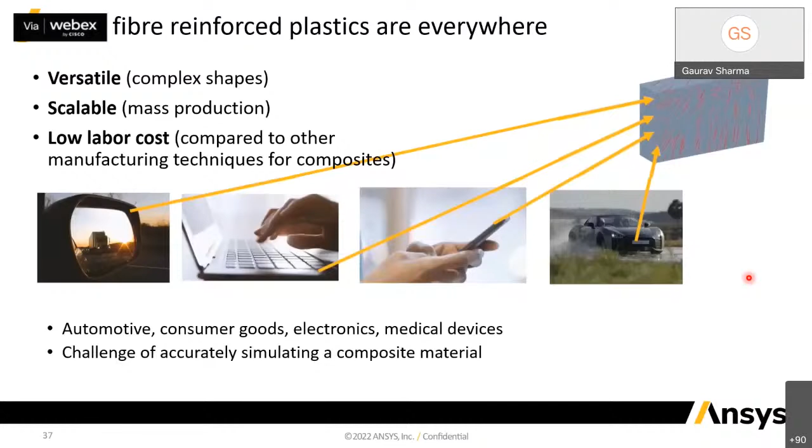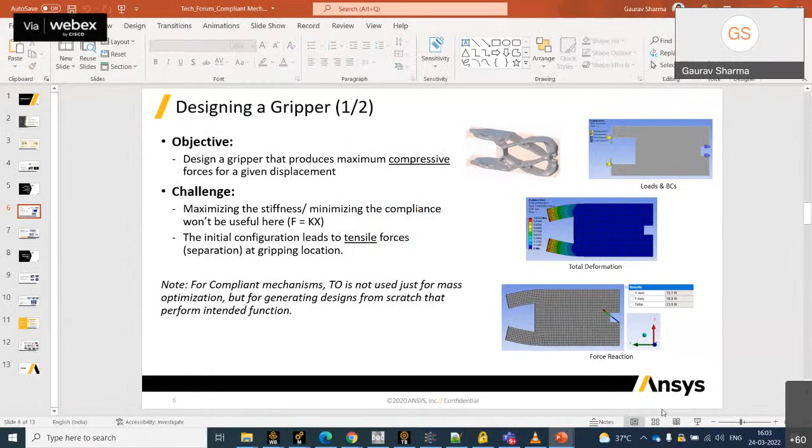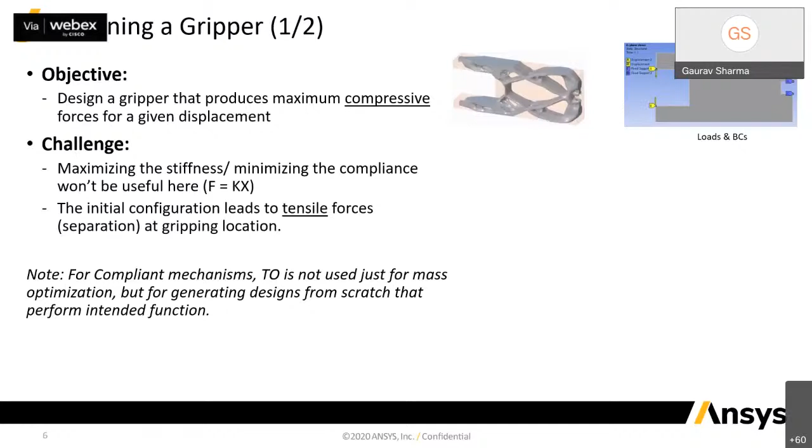Okay, Chandresh, so I have this short example that I can show you. You can see my screen, right? Yeah, it's visible. Okay, so the idea is to get a design of a gripper like this, and before performing a topology optimization on a 3D, whenever possible, I try to go ahead with a simplified shell approximation first, and then I make it 3D because sometimes they are time consuming studies. So this is the one that I performed using this shell body, applied loads and boundary conditions, and the optimized structure I got looks something like this on the shell side.

This gave me the confidence that this is the design I'm getting from optimization, and this is the 3D design that we are chasing. So now with this design, I can freeze on my loads and boundary conditions and my approach, and I can move on to a 3D analysis and perform a final analysis in order to get something like this. So these sort of studies we do day in and day out. So it works well with shell.

Okay, and was there any weight saving in this also? This was not exactly designed for weight saving. Let me tell you very honestly, this was a different exercise altogether. We did it for a concept establishment. If you see, this was started from something very raw. This is a starting point here, right? And this is eventually the final point.

Usually the weight reduction studies start from an initial design and they take us to a final design. But this was for concept generation. I might be going into a direction where I'll hit some confidentiality, so I won't be speaking too much. Understood. But this is how it is. Yeah, okay. Thank you.

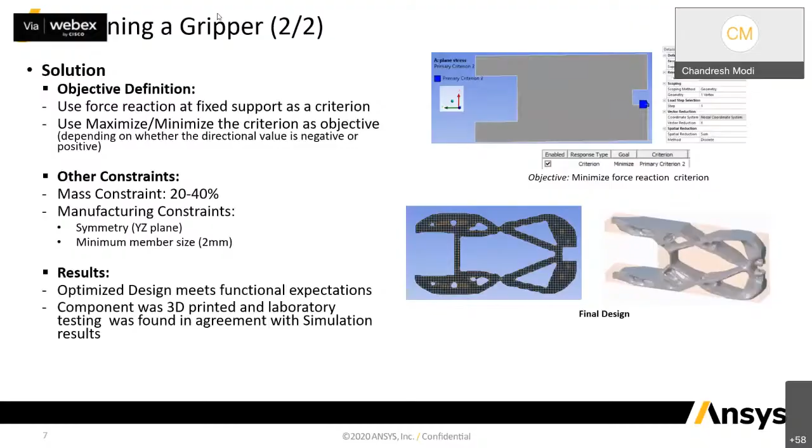So thank you. This is Sandeep here from John Deere. Hi. I have a question regarding the DOE which you have done. So, is that parameter on the DOE, right? Is it manually you have to change every parameter and do the run, or is it automated?

See, for the sake of proceeding, it is fine, great. We have something, we are not stuck. I'm using the tool for the first time and I'm not stuck, I'm going ahead. But for the sake of having a control on what is going on, this is not great.

Usually based on my experience, I will understand, okay, this is a certain dimension and the scope of change that I have on this dimension is from this to this. If I go beyond this, it will start interacting with something else. I cannot go beyond this. So usually the range of variation is something which an engineer decides. And this comes from his experience with the current application. Okay. Same goes with loading, right?